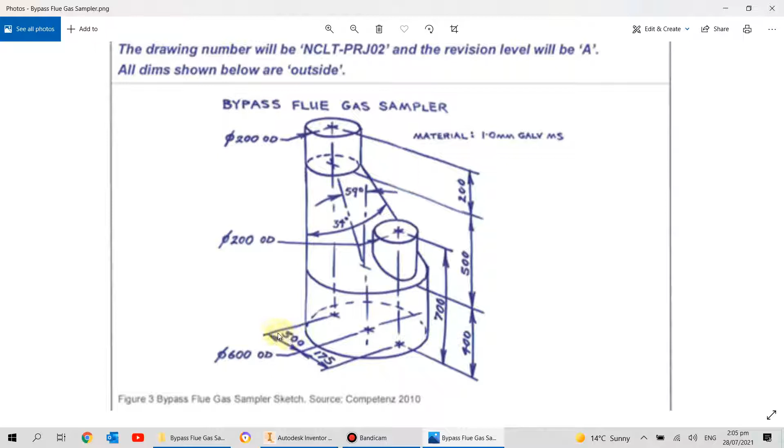Righto, so now we're going to check out the Bypass Flue Gas Sampler. So looking at the drawing, it is a little confusing, but I've drawn this already, and I've found that if this is 300, now it looks like 500, then things work out pretty good. These angles in here are a bit strange. They work out on the final drawing, but they're a bit misleading how they're drawn here.

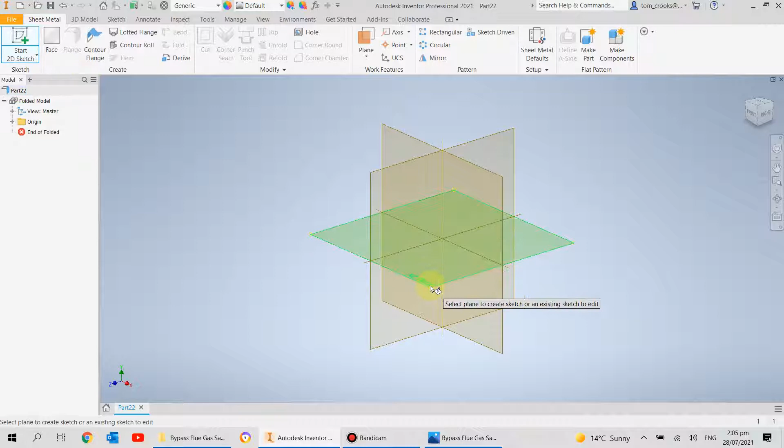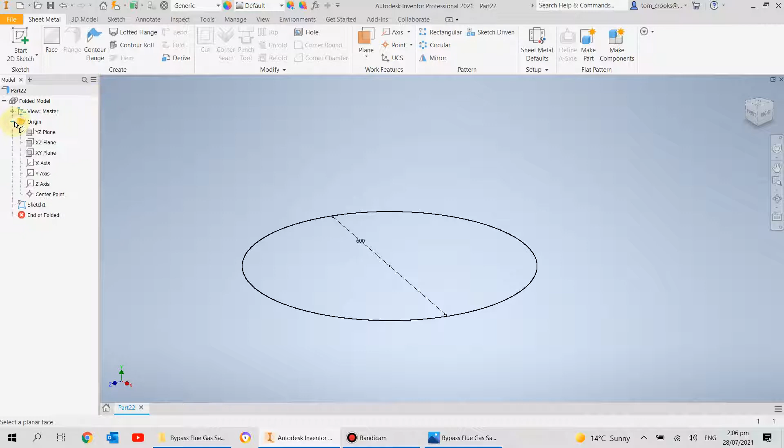So the way I go about this one is I go new, sheet metal, and I'm just going to start by drawing all the planes and all the tops of the spigots, tops and bottoms of the spigots. So first one, I'm going to do the circle at 600, like that. Then I will do an offset plane, and I'll just come over here and highlight the plane I just drew on, which is that one there.

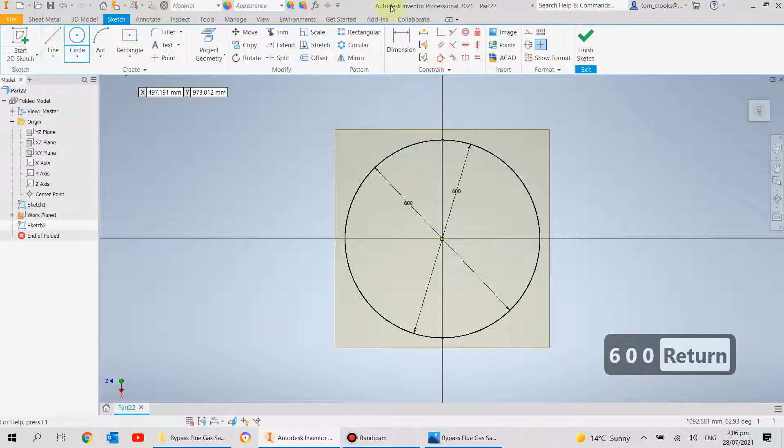And the spigot is 400 high, so 400 there. And do a sketch on this one. What I'm going to do is I could just project the geometry of that circle, but sometimes it plays up when it comes to lofting a flange that way. So I'm going to actually draw another circle, just so we have an actual physical sketch there. And another thing I'm going to do while I'm here is I'm going to go into construction line, draw a line from the center to the outside, and that'll help me a little bit later when I come to put some points on it.

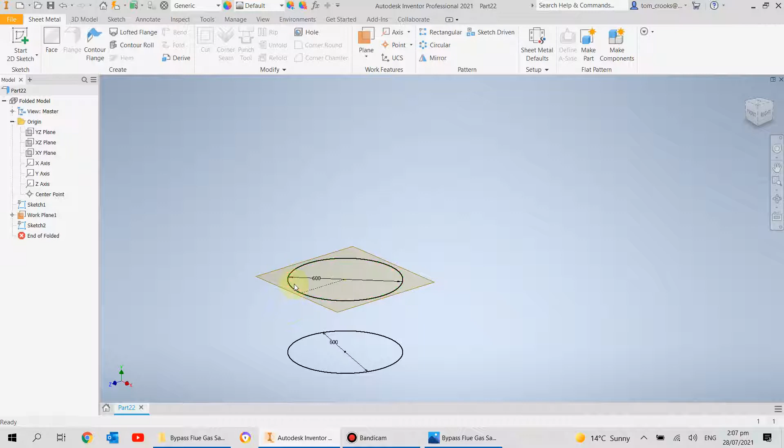So we've got the bottom spigot outline there. Next thing I'm going to do is another offset plane from this one, and this will be to the top of that little spigot there. So 700 minus 400 is 300. So let's go 300.

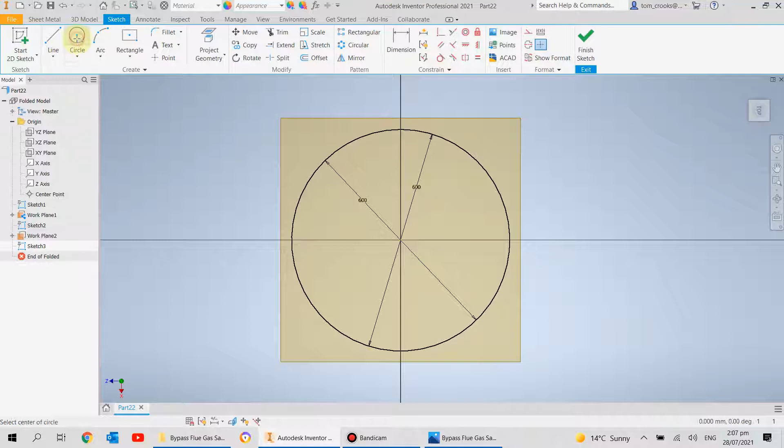And now I'll start a sketch on this one as well. What I'm going to try and do is keep everything in the same axis. So I'm going to keep the seam towards the back of the piece, because it should be easier that way. So I'm going to now draw the top of that spigot. It's 200 diameter, OD it says, so we'll go 200. And it also says it's 175 from the center, so we'll go 175.

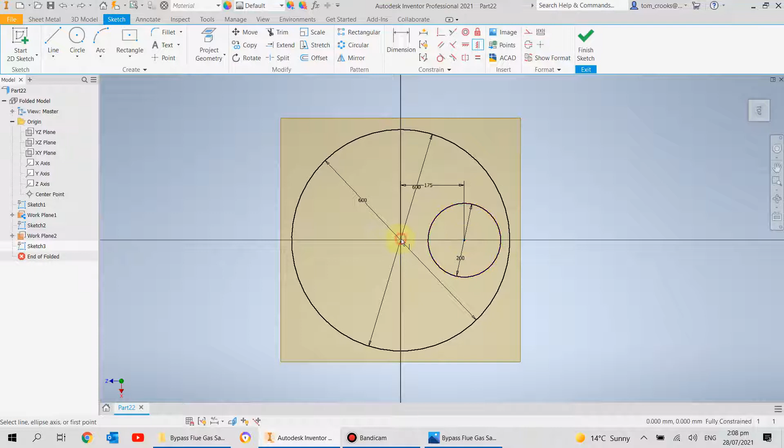And it's not quite constrained yet, so I will just put a horizontal constraint in there, and hopefully it's the right one. No, it's not, so I'll go back, and I'll go vertical. See the views on its side, so now it's vertical to that line, so that'll keep it where we want it. I'll finish that sketch.

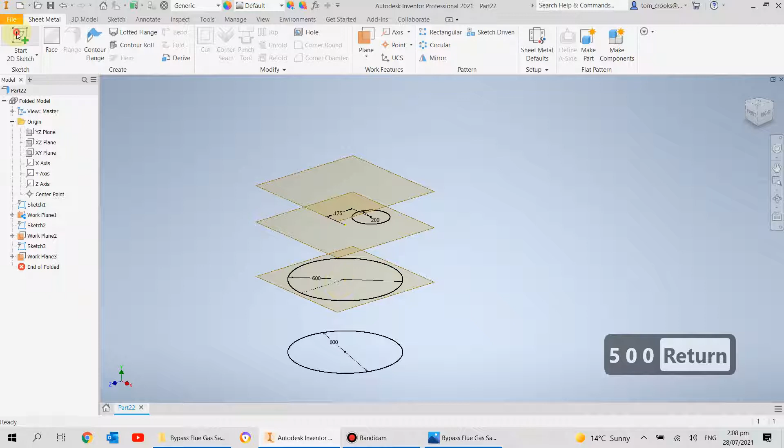Now I'm going to draw the top of the truncated cone part. So I'm going to go offset plane again. From this one, it's got a measurement of 500 there, so I'll go 500. And I will do a sketch on this plane here. And it's got a funny looking measurement like I mentioned before, but it works out, 300 works pretty good, so...

I'm going to 200 OD there, and I'll go out here to here, should be 300. So it looks different to the drawing, but it does work out later on. And I'm also going to constrain it along that same line. And another thing I'm going to do, which I forgot to do in the last one, so I'll have to come back, is I'm going to turn it onto construction line, and I'm going to draw a line from the center of that circle out to the edge, and I'll finish that sketch.

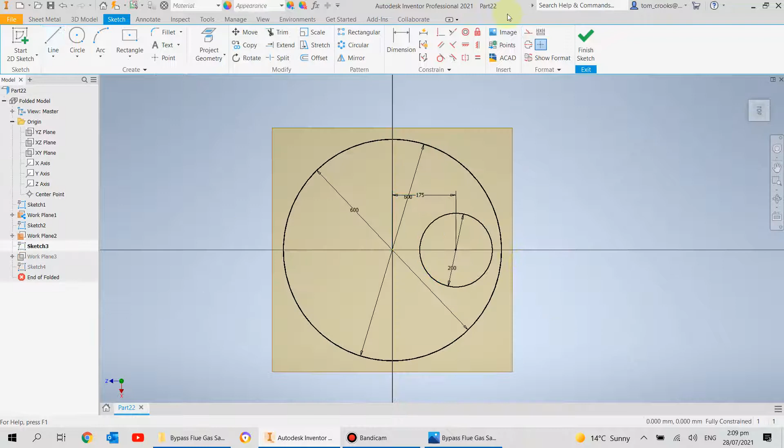So what I'm going to do now is I'm just going to go back to this sketch and draw that line in, because I forgot last time. So construction line, highlight that, line center to this outside. There we go.

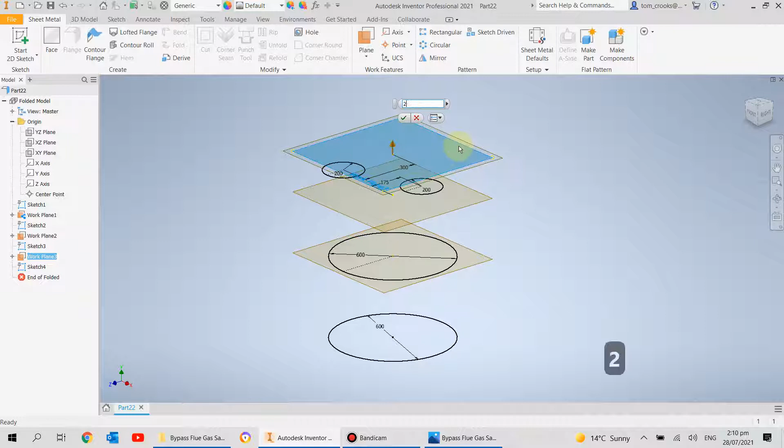Now, the last plane is 200 above that one, so the top of that spigot. So I'm going to do an offset plane from this one up 200. And I'm going to do a sketch on that one as well. And I could project that geometry, but I'm just going to do another circle just because it seems to work a bit better when you do that. So what I will do though is I will project the center of it, and I will do a circle from there at 200.

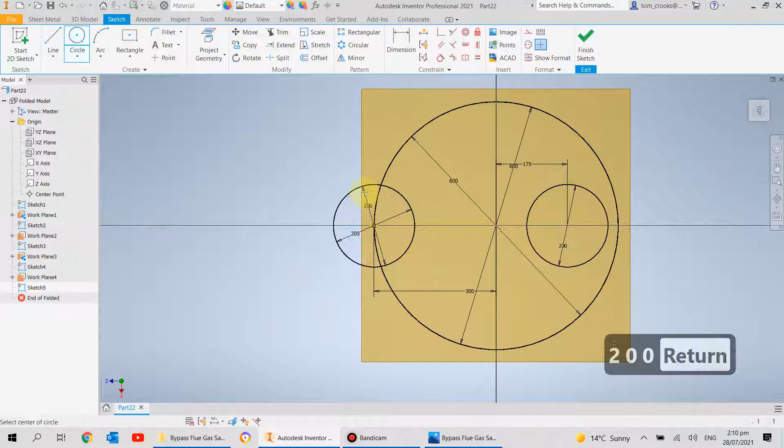Right, so we've got all these points here. So what I'm going to do with this is I'm just going to save this as the overall drawing, or the whole drawing, we'll call it that.

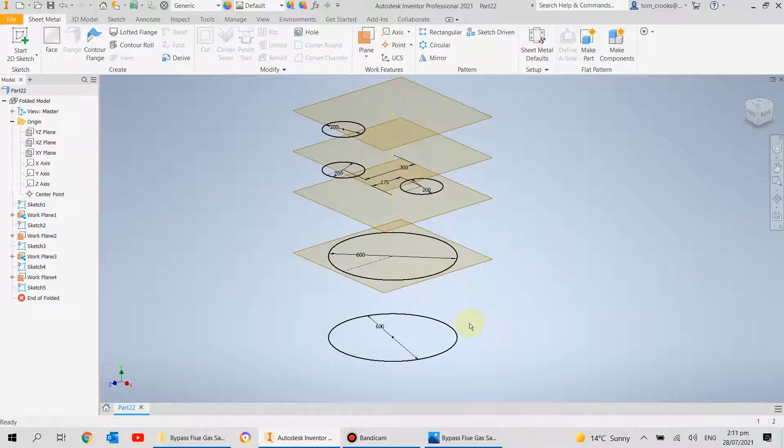Now I'm going to start making the sheet metal parts. The reason I'm doing it all in one drawing is that when we come to join it all together, we can just align everything to this origin point here, so we don't have to worry about awkward constraints. We can just pick up the XYZ 0 point and do each part to that.

So for the base, what I've got to do before I carry on is just one more thing, or a couple more things. I'm going to put the points in, so I can put a point where those lines end. I'll do another one, and I'll do another one there.

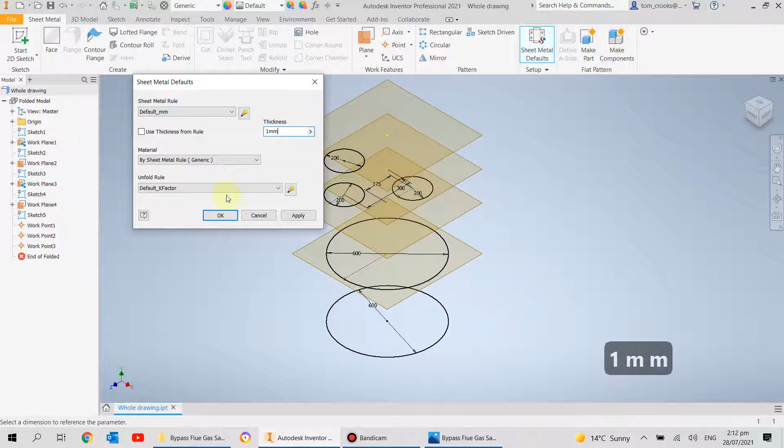Do the points, and I'll go into sheet metal defaults, untick use thickness from rule, and type in 1mm instead, and apply that. So now I'll save it. That's what I should have done before, but we got there in the end.

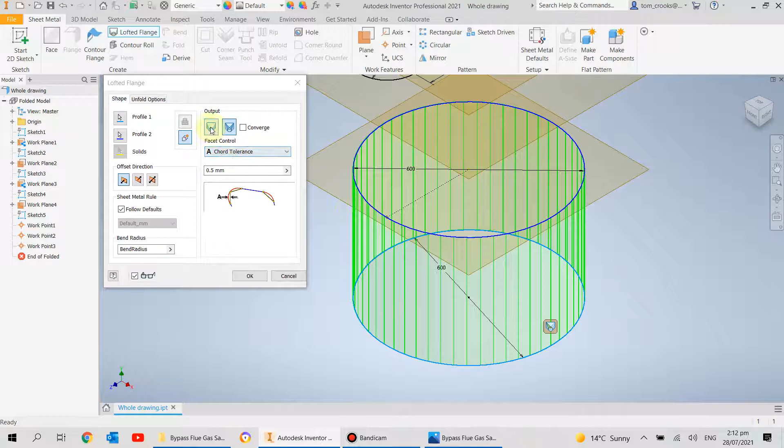Now what I can do is go lofted flange and pick up on these two surfaces here. I want to go to a smoothed finish, a die formed finish. And because this is OD, I want to change the direction so the line goes inside. So there we go, we've got the spigot.

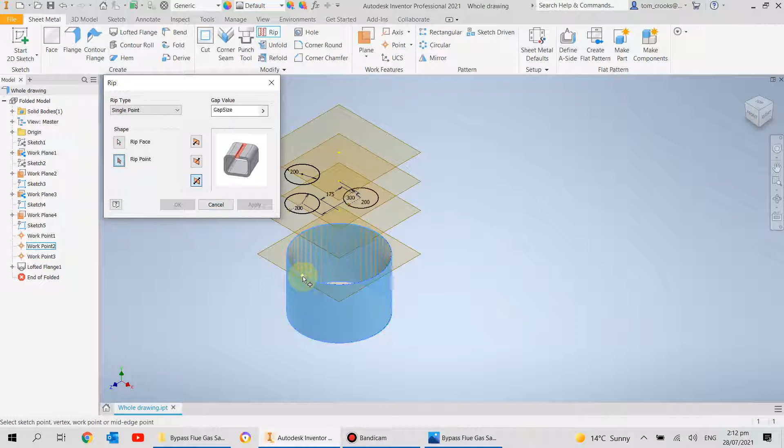There it is. Now from this one I should be able to go up to rip here, click on the face, and then click on that point, and type in 0.1 there. So 0.1, I just do that as a very small gap.

Now I should be able to go create flat pattern, and that'll work it all out for me, so it'll be the right circumference and everything. Go back to folded part.

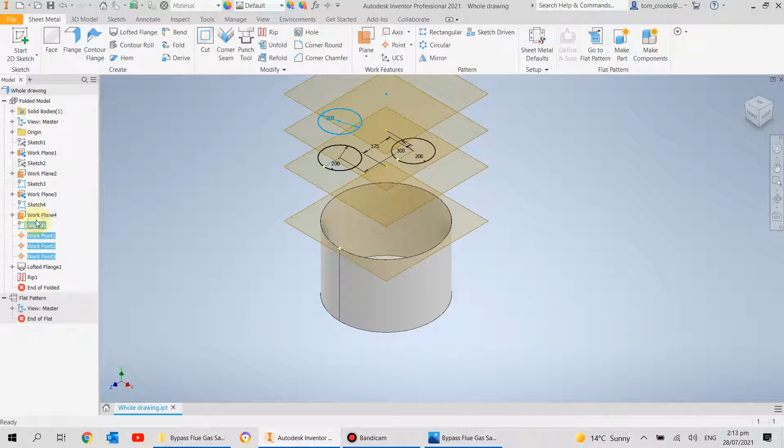Now I'm going to turn off all the things I don't want to see. I'm just going to hold shift and go over everything, take the visibility off. There you go. So now we've got the bottom spigot. And I will collapse that there, just tidy it up. So bottom spigot, there it is.

Just try and make sure you don't save over that drawing, the whole drawing thing, so make sure you save it as the new part. Now I can close the bottom spigot, and reopen the whole drawing here. I'll ignore that bottom bit because I've already got that as a different part.

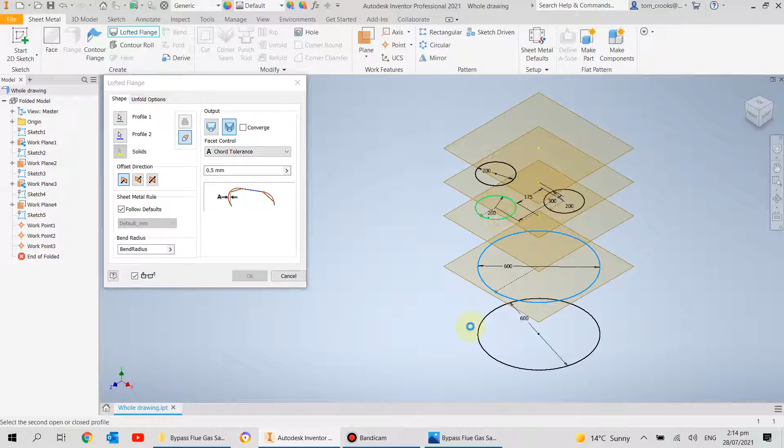So now what I'm going to do is the center part. Same thing as before, lofted flange - we go here to here instead. I want to do a smoothed finish, die formed there, and I want it to go to the inside, so inside like that. I'll go OK, so here's that bit there.

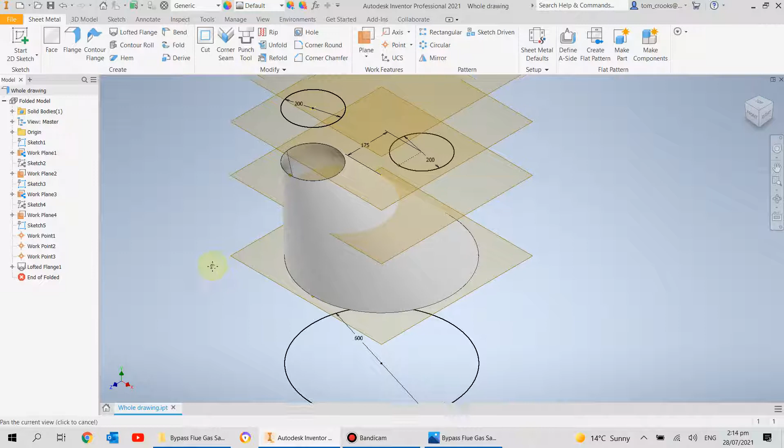With some complicated shapes, when you go to do the rip, it can be a bit more difficult, so it may not work, but there are ways around it, and I'll show you that. What I'm going to do here is go to rip, and go to that surface, and see if it's going to behave for me. And it does, so that's good.

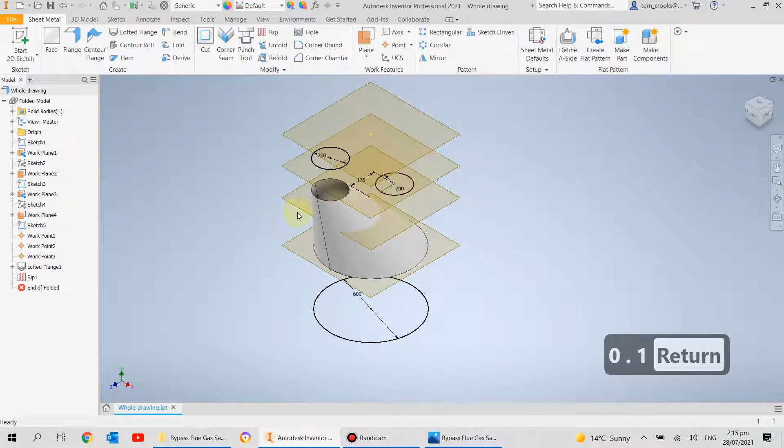Once again, I'll change that to 0.1. And not to forget, what I've got to do now is cut a hole for this top spigot. So I'm going to select cut, select that shape, and change this to all, and it's already going down, so that should cut a hole for it. Let's give it a go. There we go, we've got the hole for the little branch there.

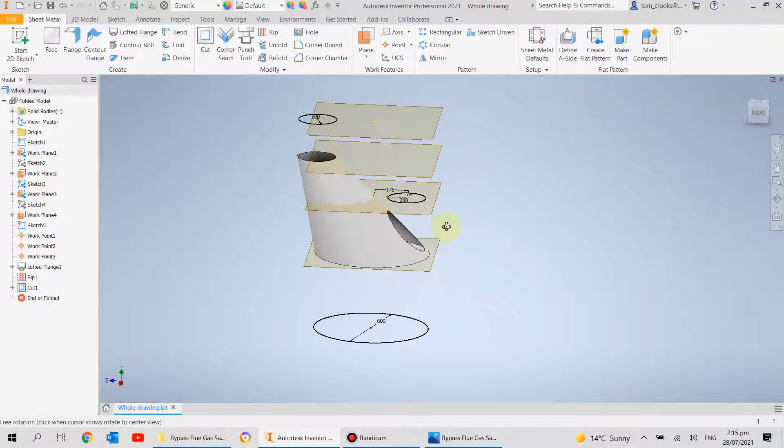Same thing as before, I'm going to turn off all the things I don't want to see. Just click on a bunch of them, holding shift, and just have a quick look there. Yeah, that looks alright.

What I'm going to do here is just go, same as before, create flat pattern. So now we've got the flat pattern there. Go to folded part again, and there we go. Now we've got the center transition. So I will save that as transition.

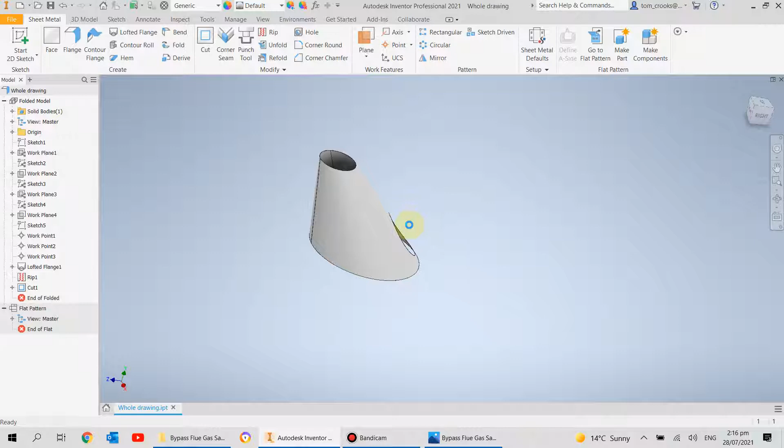Right, so I'll close that bit off. Open up the whole drawing again.

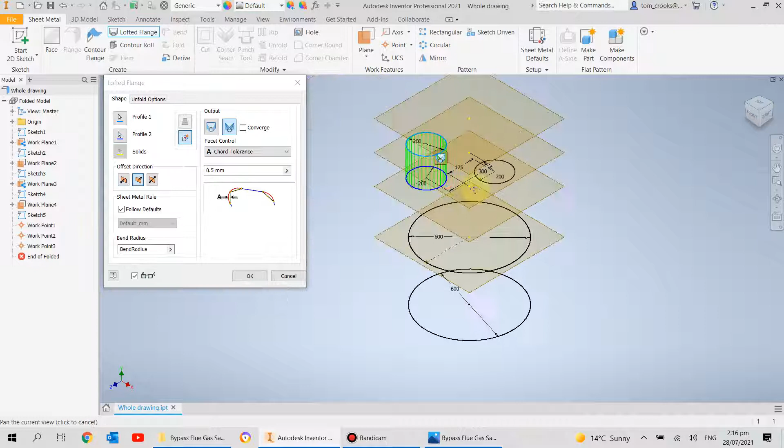Now I am going to do the top spigot, and then I'll do the tricky one last. So top spigot's easy, we just go here to here, die formed again, change it to inside so it's going inwards, and go OK.

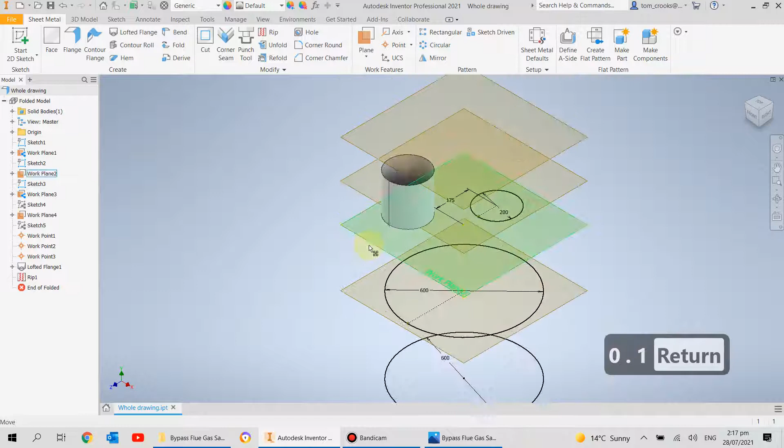We go to rip, select that face and that point, and once again change that to 0.1. Same as before, grab all the stuff, turn off what you don't need, so we're only left with the spigot there.

Make sure you go create flat pattern, it doesn't actually exist until you do that. So you have to go create flat pattern, then go to the folded part again. Now I'm going to make sure I save this as the top spigot. And there we go.

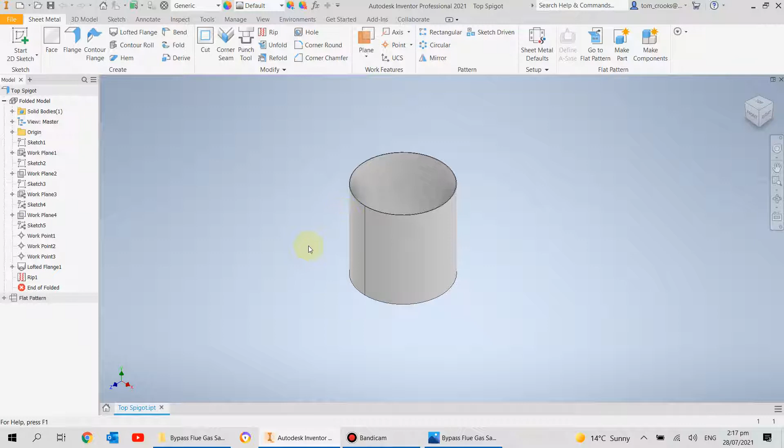Now we get to the tricky one. So I'll close out of that, I'll go back to this original drawing here.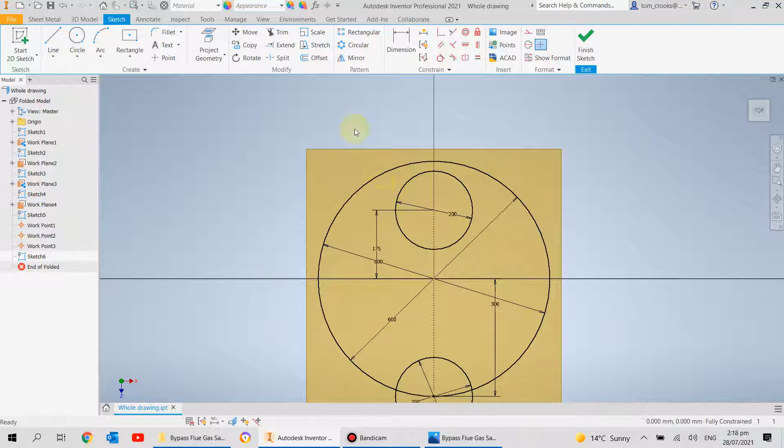So what I'm going to do with this one is I am going to draw a second circle down on this plane here. So I'll start a sketch on this plane, and you can see it's gone in front of where I need to see. So I can just go right click and slice the graphics, and that'll get rid of anything in front of it. I'm going to draw the same circle.

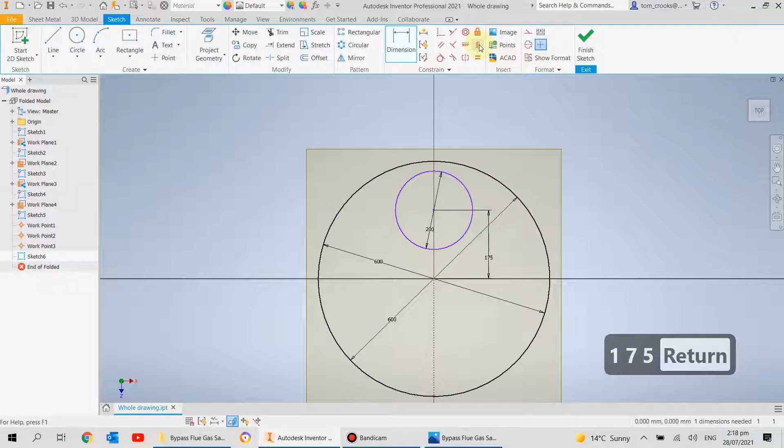I'm going to draw a 200 diameter, one dimension at 175 from the center. And I'm going to make sure it's constrained properly. And there we go.

Now there's another trick to this one. So what I'm going to do is actually tidy this up a wee bit because it's a bit busy for me. So I'm going to get rid of things I don't need, I don't need to be seeing that sketch, and I don't need to see the very top part because I'm not using that for this drawing.

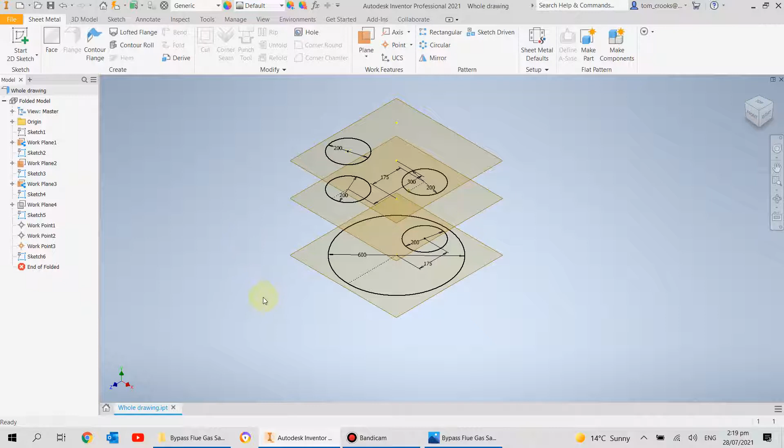Work points, see the point three is the only one I want, it's the only one that's touching it, so I'll turn that one off, and I'll turn that one off. Just tidy it up as much as you can, really, just to make it a bit easier for yourself. So I'll keep the things I need on here.

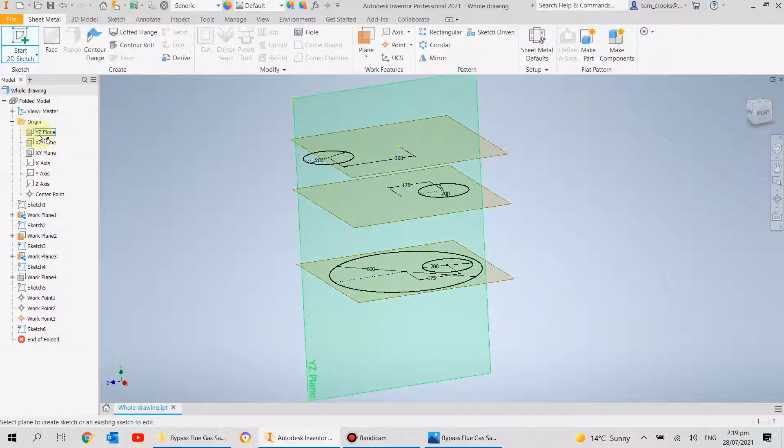So now what I want to do is draw like a side profile of this thing. I'm going to start a sketch and open up the origin planes, the one that crosses across the center like this. And I'm going to go to project geometry and project the ends of these circles.

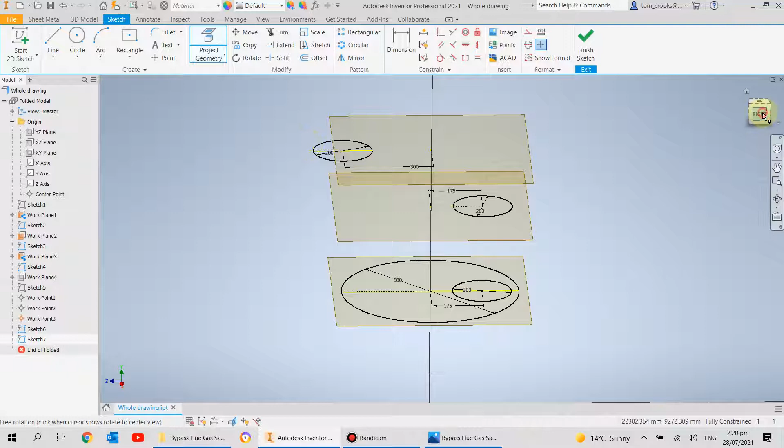Sometimes you have to go around and just select the thing there, and go back to straight on view again. Now I'm going to go draw a line there to there, and draw a line from the other end of the circle there to there.

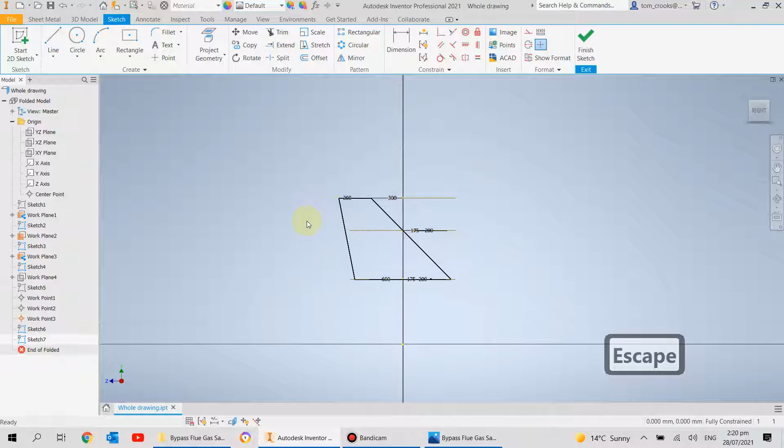And I am going to extend these points out. So I'm going to draw a random line up here and just hit extend, so it should go as far. So I just need to move that line a bit closer.

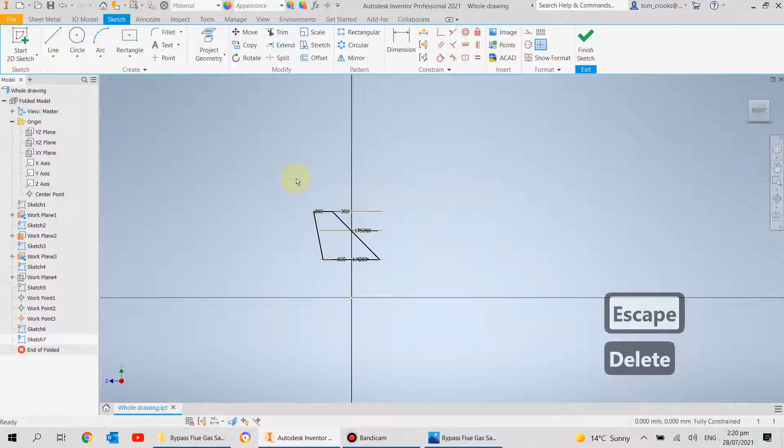Right, so extend's not really working for me, to be fair. So what I can do is just draw a line up and draw a line back down again. And down the bottom, I'm going to draw something along the lines of this to this.

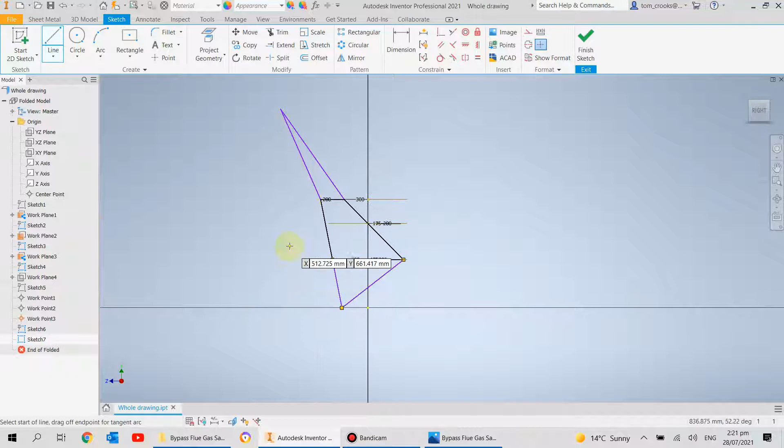So what I'm going to do then is make these lines parallel, that one parallel to that, parallel to that, and this one parallel to that one. And I will just check what's going on here, why is it not happy? I don't really know, but that's fine.

So what I should be able to do from here is find a center line. So if I go grab this line here and go center to center, and we'll use that, we'll say that's all right. We'll finish that sketch, so now we've got the side view.

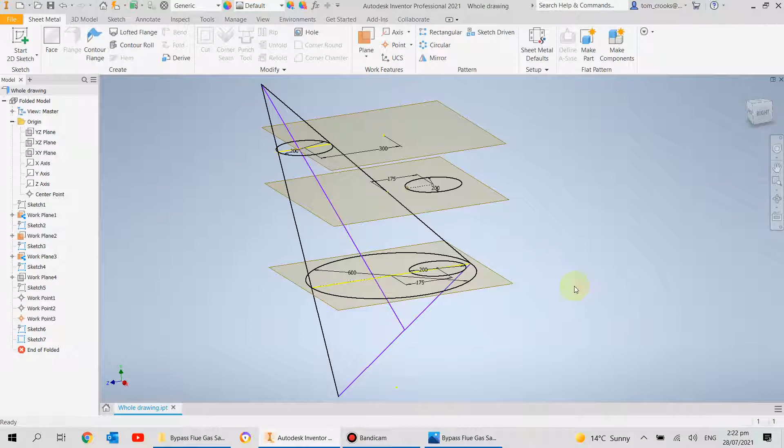We've got like a triangle drawn in there. So now what I can do with that is a lofted flange from there to there. Die formed again, make sure it's going internally like that. Okay.

Now what I'm going to do is go into the 3D modeling space and revolve that triangle about this axis. And we're going to do it in a cutting motion.

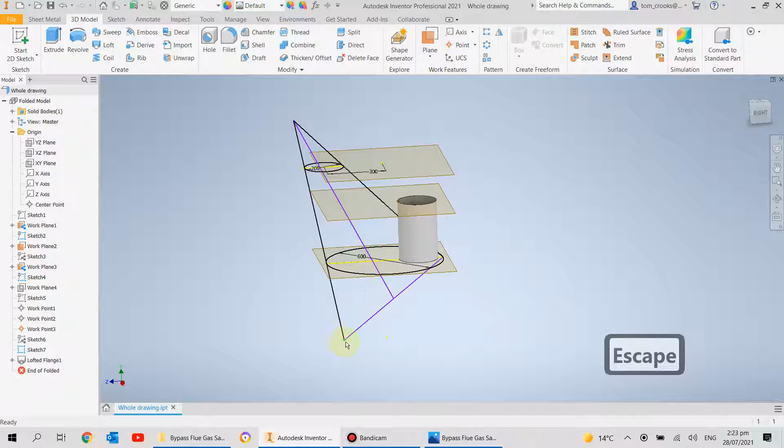So excuse me there, I need to go back. See how that revolution wasn't quite where you wanted it, so I just need to edit the sketch a little bit.

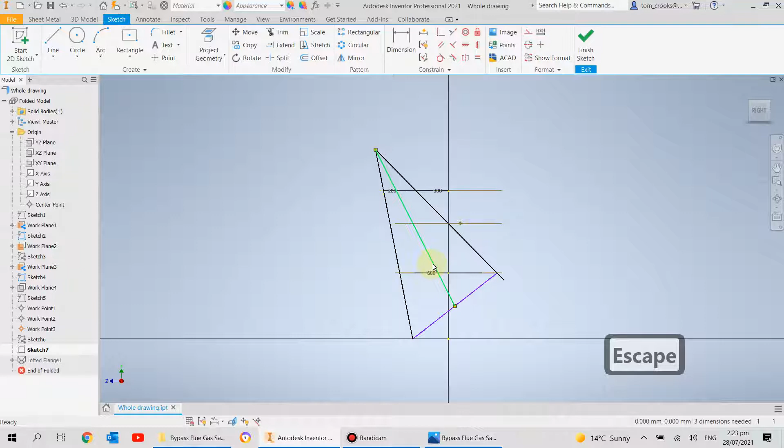And I need to have the same length of line here. So this is my bad, having to go back a wee bit, but that's alright. I need to have this length the same as that length, so I'll dimension this from point to point and hover close to it. So, 1172.774 whatever.

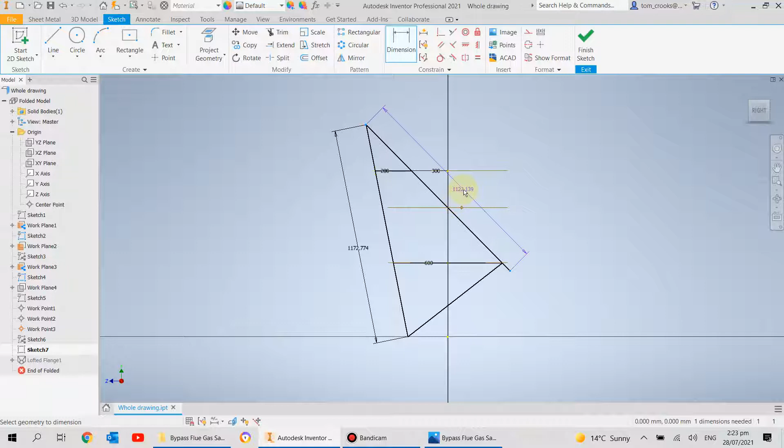I'll dimension this from there to there and click off to the side. Now I can go equals, click on the other one, and press enter, so now they'll be even.

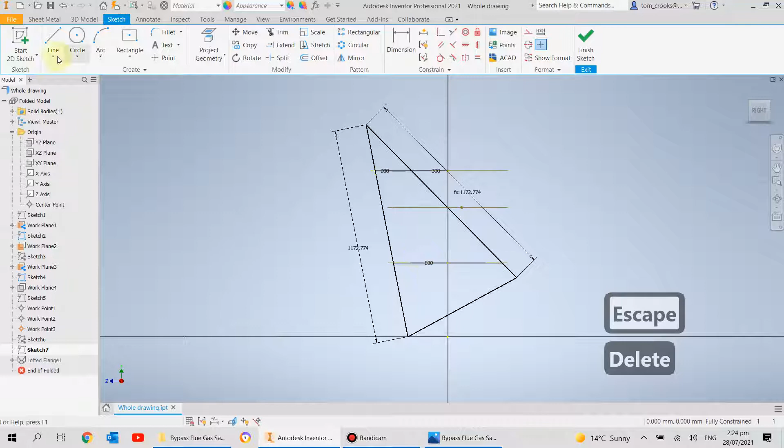Now I can draw a line across here from there to there, and I'll delete that old line since it was placed there by mistake. Now I'll draw a center line through this, from the point to the middle of the bottom, which it's just snapped to. There we go, this will be better this time.

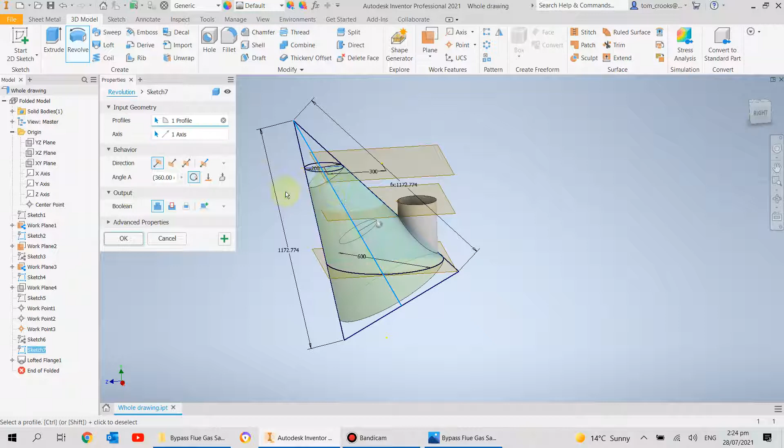Now I'm going to go Revolve, get that triangle there, select the middle as the axis, and put it onto Cut. Now you can see the cone follows the shape of the transition there.

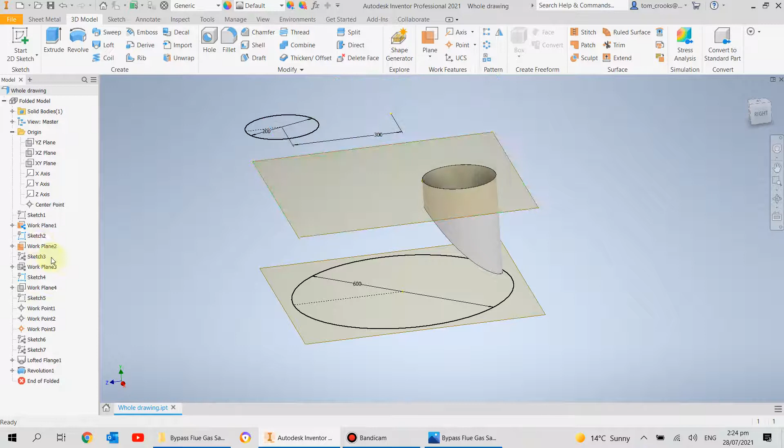So now we'll cut all that off, and we're left with the spigot. I'll turn a few things off here to make it easier to see - turn off this work plane, turn off this work plane, this one here as well, and whatever else I don't need.

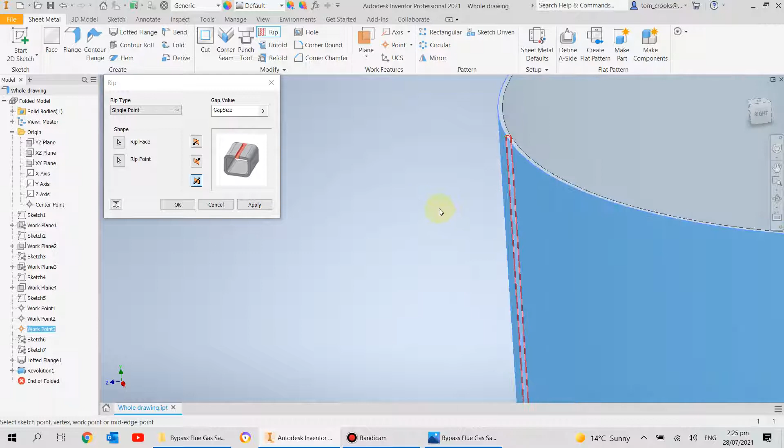Now I should be able to rip this. So we'll go to sheet metal again, and go to Rip - surface, point, see it's coming up there. Now I can go 0.1 again, and create a flat pattern for that bit. So there we go, flat pattern coming out alright.

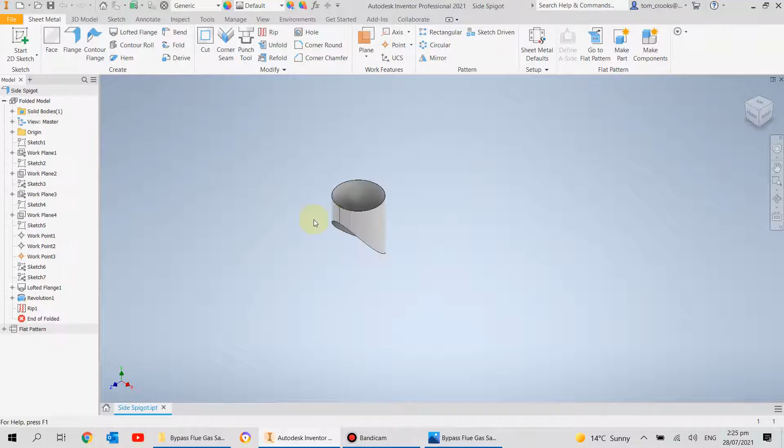So now I'm going to collapse this stuff and go File, Save As, Side Spigot. Yes. I'll also turn this work point off since I don't need it anymore, and quickly save again. So now we've got all the individual parts drawn up.

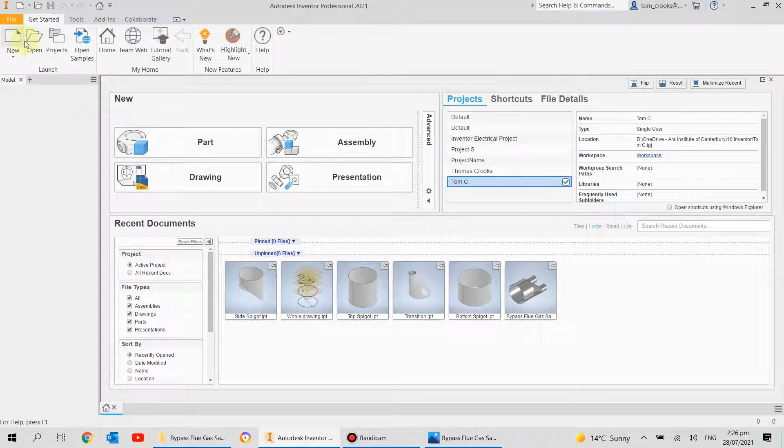All I need to do is assemble it all for a drawing that I can dimension. So I'm going to close that, and go New, Standard Millimeter IAM - that's the assembly file.

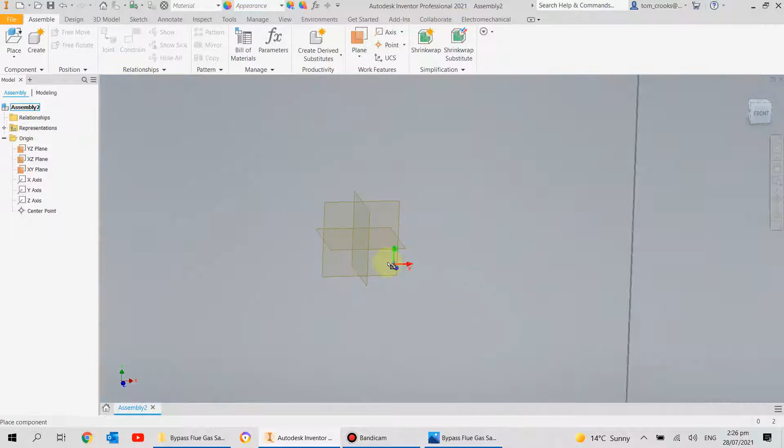I'm going to turn on these planes, go up to Place, and find the file I'm using. It doesn't matter where I start, so I'm going to go to the bottom spigot and just drop it in there. The other thing I'll do to make life easier is go View, Shaded with Edges.

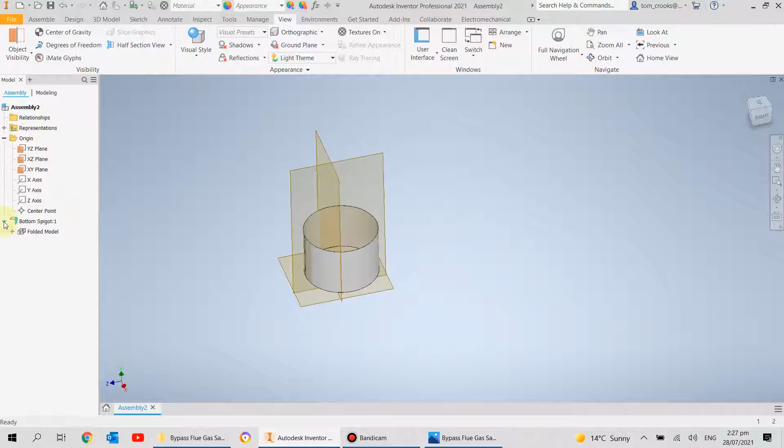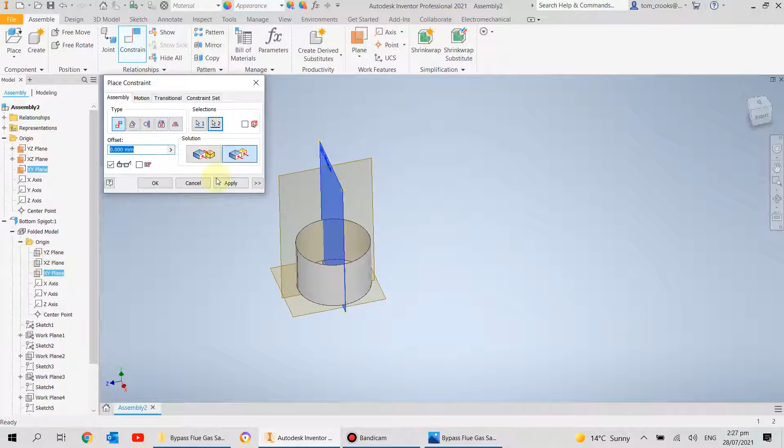Now you can see it hasn't dropped into any particular place, so I'll expand on this and expand on the origin. I'm going to go to Assemble and Constrain. I could do YZ plane to YZ plane, but I'll go flush, so they're all flush. XZ plane to XZ plane, flush again. XY plane to XY plane, and there we go, flush. Now we're all constrained to the origin of the assembly.

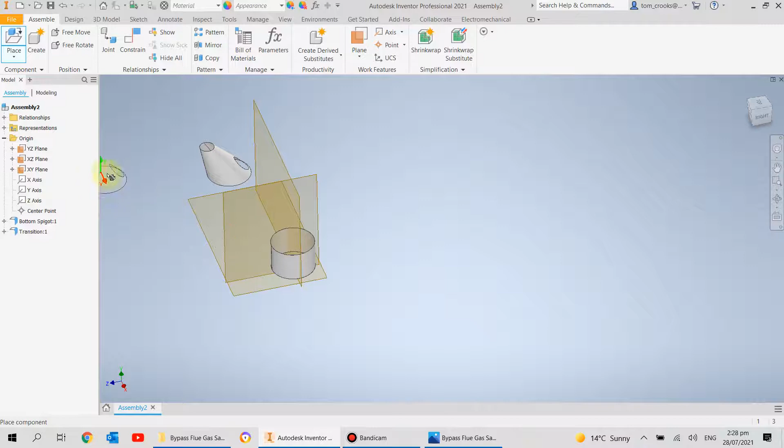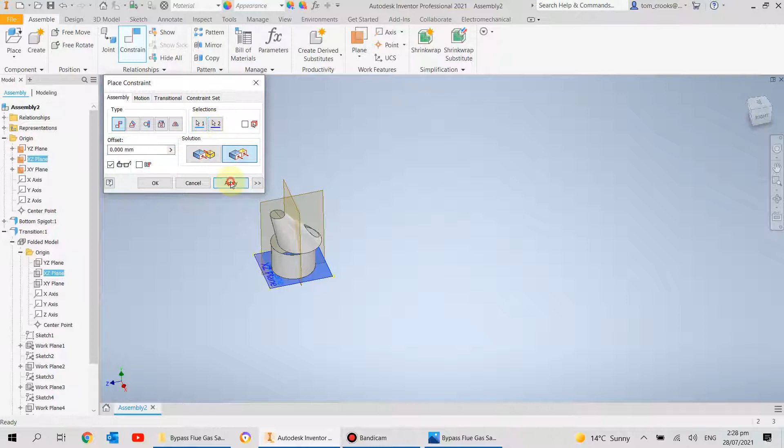Now it's just a matter of bringing in every other bit and doing the same again. I'll go to Place, get the transition, chuck it in there, and press escape. Now I'll expand the folded model and the origin, and go constrain: YZ to YZ, make sure it's on flush, apply; XZ to XZ, flush again, apply; XY to XY again. There we go, so that one's on there.

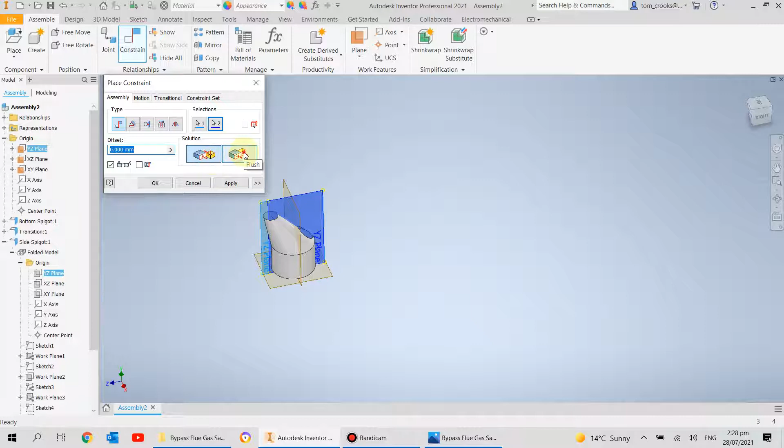So now I can collapse that, and bring in the side spigot - chuck it in anywhere and do the same thing again. Expand it so you see the origins, constrain: YZ to YZ, make sure it's on flush; XZ to XZ, same; XY to XY, same.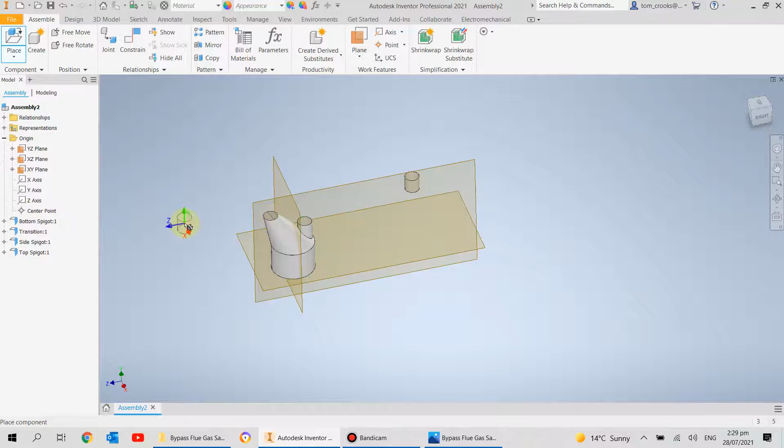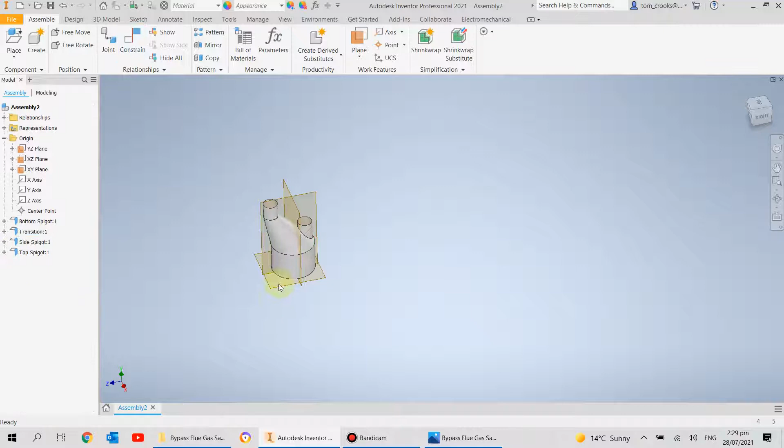Last but not least, we're going to place the top spigot here. I'll dump it in a random position over there, and do the same thing again - expand all this out and constrain: YZ to YZ, make sure you're in flush, apply, apply, apply. So you can see, from drawing all from that one original drawing, it was really easy to put this together. Something to keep in mind.

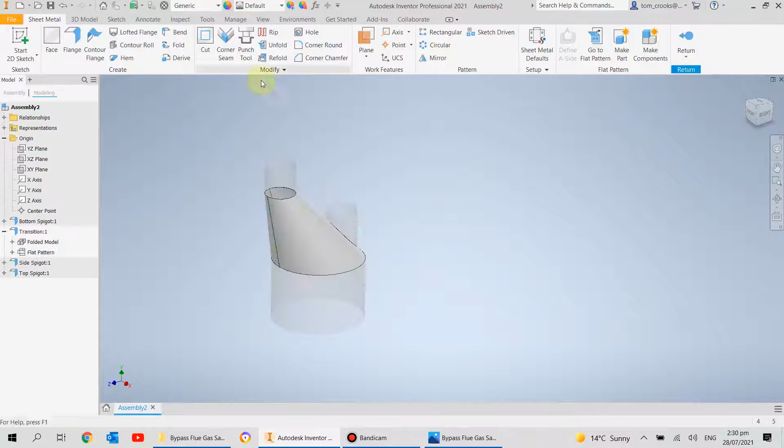I'll turn the visibility of these planes off now. So now we have an assembly of the duct, and that's what it looks like. Since we've done it properly, all with flat patterns, I can double click on this and open up each part, and go to the flat pattern from there.

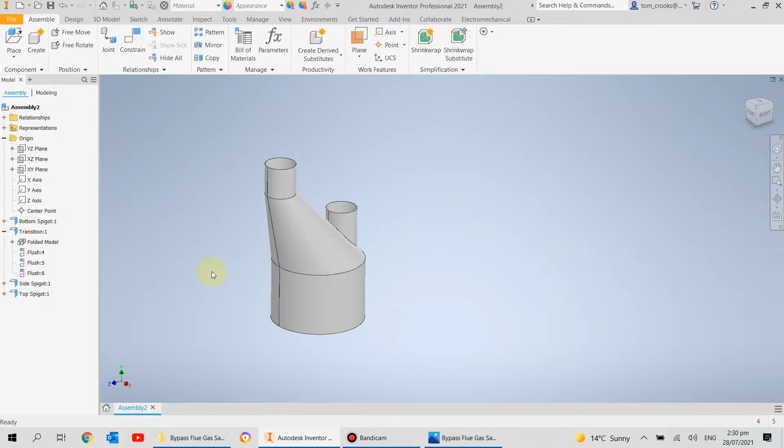So there you go - now you can bring that in and dimension it, and you can also bring in all the individual flat patterns as well. We'll go through the paper space at another time.